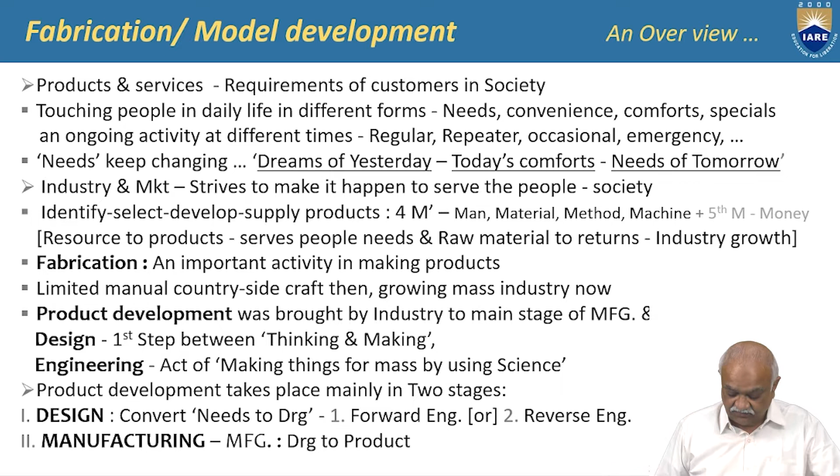This product development, the initial stages up to design, is majorly controlled by R&D - that means that is where the development, research, everything starts. And if you see product development as engineering, it has got two stages, two methods: one is forward engineering, another is reverse engineering.

Mostly forward engineering is the traditional process. What we do here is, we conduct surveys, we go for studies, and we identify what are all the things required for a customer. That means this is a process where customer needs are being identified.

The needs - convenience, comfort, specials, regular or repeater, occasional or emergency - all these things have different concepts. That means a need is to be studied in a different way than a comfort, and a regular one is studied differently than an occasional or emergency one. In case of emergency, it is a direct, immediate need, whereas if it is regular, it may not be an immediate need, but it has to be looked at in a different way.

In the same way, a customer never tells you, 'I want this.' The customer always tells you, 'it should be like this, it should be like that.' The designer only is converting that into a feature, that means a product. Suppose you want a pen, he says 'I want to write,' but he will never tell you 'I want a pen or pencil or color or this.' The designer converts that into a feature.

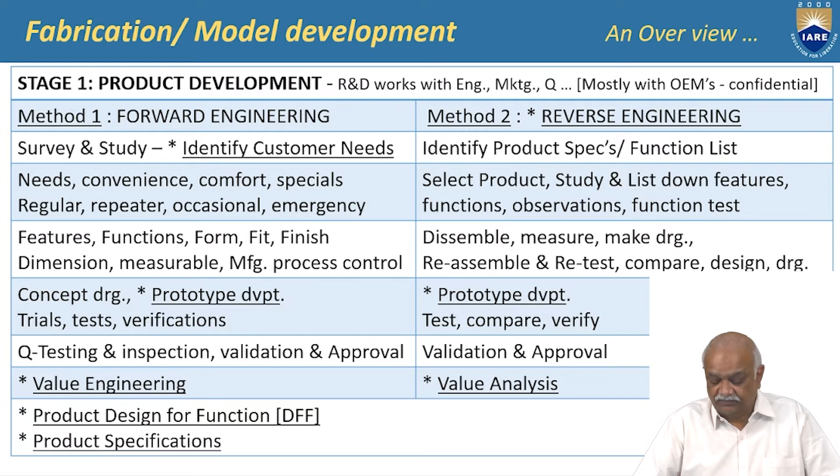Then we get into the next stage. After this prototype and concept drawings are tested, now we have to study whether it is manufacturable.

Sometimes what happens is, we can do it one or two, but when you have to do mass production, it is very difficult. Some processes may not be available, some manufacturing methods are very difficult. So we do design for manufacturing - that means whatever design, functions, features we have given, we discuss with the manufacturing people and then redesign or fine-tune it so that you make a drawing which is easily manufacturable.

Earlier, because we were making very low volumes, it was not a problem - disposal, waste, everything was less. But in mass production, in millions, you have to consider you are not spoiling the environment. You have to think about whatever items you are wasting or disposing, or pollutants coming during the process. If anything is hazardous to human life or environment, it is preferred to stop that. Lot of waste and gases will come, you have to avoid that. Otherwise you are putting people into danger, and society itself comes into hazard. That's why design for function, design for manufacturing, and design for environment - all three are very important.

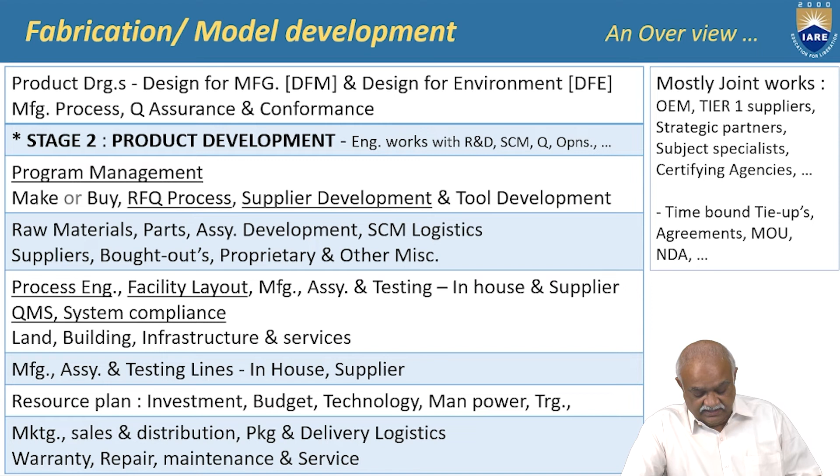In a simple way, input is from the customer, that is given to R&D, and R&D gives output as a product design. That is given as input to the company where it is manufactured, and the output is a product that is ready. It is given for marketing as input, and from marketing output is directly to the customer. So from customer, whatever is selected as a need, you have given it to the market in the product. In this stage, input, output, you have given.

But these are all wanted outputs - there are some unwanted outputs. What happens is, while making the product, you may run into some problems. You may be producing waste and you may be developing some scrap. All these things have to be returned. And if they are not returned, what happens is it gets left as junk in the society. What will you do with that?

So most of the time it is better to work as a closed loop. That means you have to take that waste, recycle it, reuse it, or take the feedback - whatever is good, continue it, whatever is wrong, correct it, learn the lessons and do improvements and upgrades. This is a closed loop - one on the information side, another on the product side.

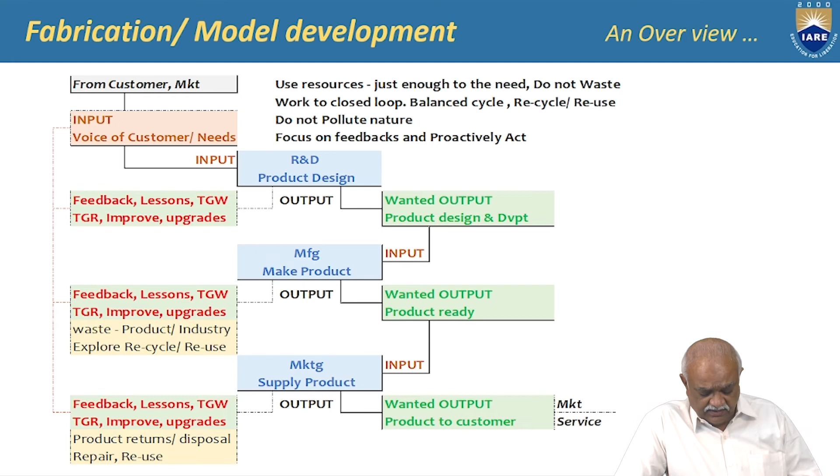If you go back to old cultural things, mostly we were working from nature. That means the agricultural farmer is producing vegetables or paddy, then giving it to food products - either a hotel or cooking, making it food, then taking it, then human waste. If you see that old process, most of the things are recyclable or they go into the bio - that means degradable in the regular environment. With industrialization only, we started adding some elements like chemicals and all, and some products are coming as unwanted products in the environment. We have to take care of that.

That is the first activity of product development. Unless they take care of that, we will not be doing justice to the engineering.

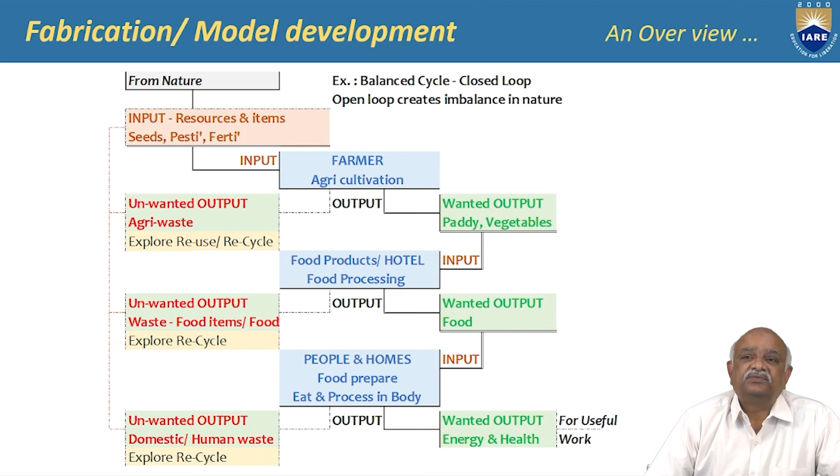In product manufacturing, at the time of manufacturing, it has to take a shape. That shape is given by the designer. The designer only is visualizing the idea and converting that into a drawing. So design is very important - the needs are being converted into features, and print in the sense, a drawing.

While doing this, in the initial days, the design process was a major activity. Design process means it is a step-by-step processing - you prepare the sketch, discuss with the manufacturing people, and make the product to be visualized as a product. It is not available, you are creating that. So while creating, you make it into a drawing so that others can understand it.

So traditionally, it is making a drawing - that means a product is being converted into a drawing and offered to the market, so it's in drawing form. For example, if you ask me how a man is, what will an artist do? He will just make it into a drawing and show you this is how a man looks. The design process is something like that - a product is made into a drawing.

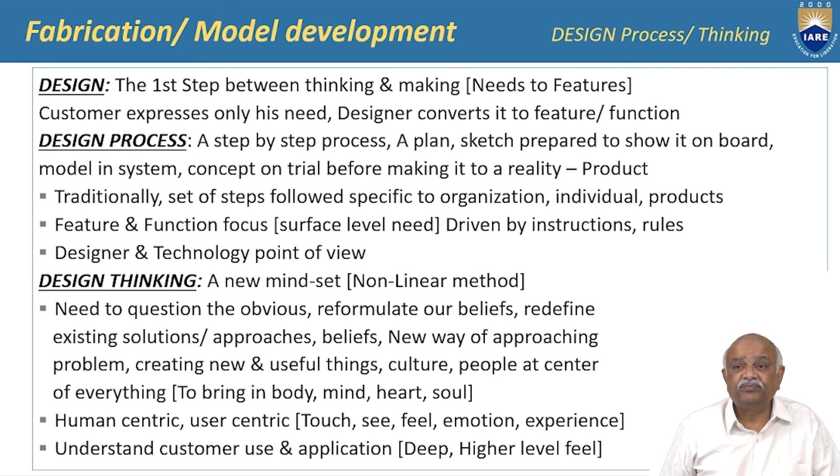Now most of the things coming in is that additional aspect. Earlier, if you see the chart, features were collected, needs were collected, and they were converted into technical specifications, then from technical into drawing. Whereas in the new process, you involve the customer, experiencing as if it is done by him - how he feels, what the problem is when you dig in. So you involve your body, and when converting that, you involve your mind. When giving it shape, you work as if it is your own child.

And when making the product for testing, you apply it so that you yourself are using it. Finally, when you test it and give it, and people say it is good, then your soul feels very comfortable. Suppose it is told that it is not good and you have to improve - then you correct it, convert it, and give it again. That much you are doing. Whereas in the earlier design process, you make it, give it, and if it is not working, you just throw it, or improve it next time.

That means you are not bringing the user into the picture except in the first stage. In all other cases, you are doing only whatever the customer told, and giving it. Earlier it worked because development time, if it took 1 year, within that year users' thinking or ideas were not changing. Whereas now it is not like that - every month, every day, ideas are changing, needs are changing. So if you take an idea from 2 years back and bring it to market now, nobody will buy it. That is why design thinking stays with the customer and tries to give more and more.

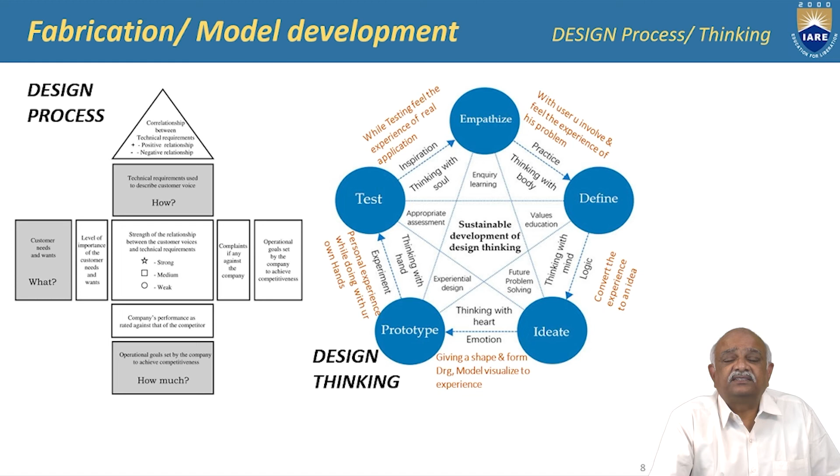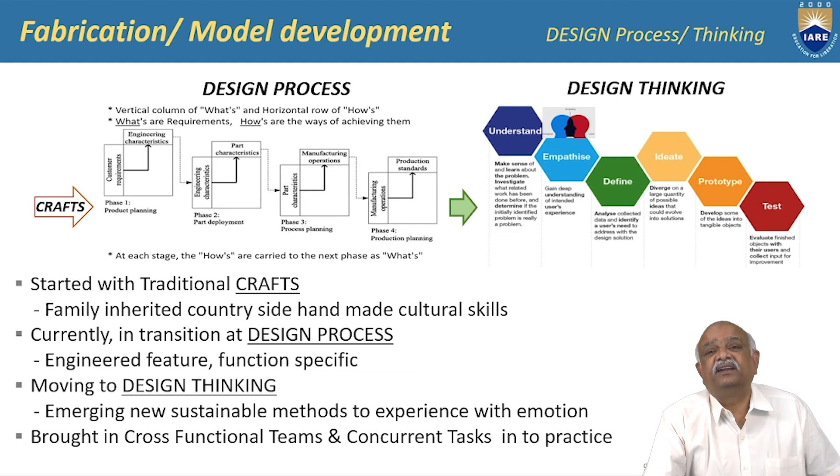This is another form - if you see how product fabrication moved, in olden days it was crafts, mostly done by families, with culture inherited. Over a period, people started going to urban areas, taking up higher studies, so this countryside craft took its death. With industry, mass production came into the picture and the design process came. Now, design thinking is one step ahead - it is going to give a feel.

You can see in the market a lot of products. For example, four-wheelers - a lot of developments have come. Earlier it was only a car, now CD has come, USB has come, Google Map has come. Appliances, if you see, earlier only voltage control, now programming, automatic, fully automatic, a lot of things have come. Online, offline, like this, the industry is taking the need and developing it.

In the process, what happened is, earlier we used to work in departments. One department completes the work, gives it to the second department, after completion to the third department - it was going in a linear fashion. It used to take a lot of time, and it is not giving an overall picture for anybody. That is found as traditional department work, and it is not in line with the requirement today.

So what happened? Cross-functional teams have come. The regular departments will be there, but across them there will be champions who will be running these new products, systems, projects and all. With this, people are working only timely for this project, and otherwise they are working in the regular department. So this way, there is a cohesion.

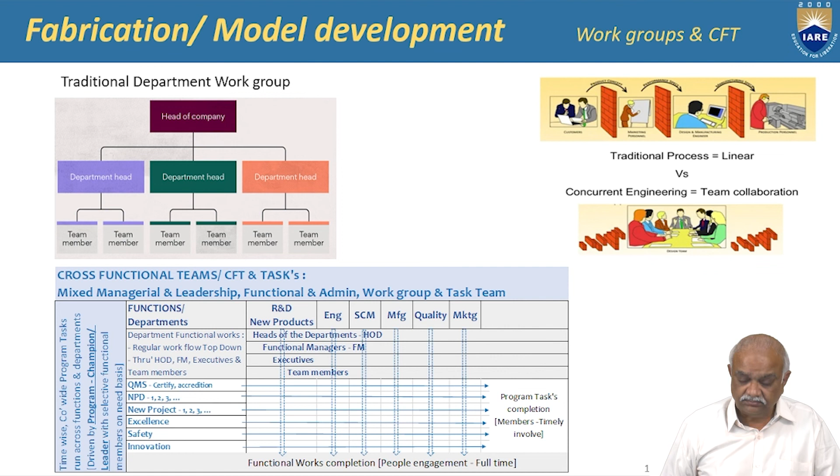So if you see the fabrication steps, they look very simple and look the same. And the journey also, when you read it on paper, looks the same. But every journey is different - it is a challenge. Why? Because the people are changing, the taste is changing, competition is changing, requirements are changing, and technology which was not available 20 years back is available today.

That time, people thought telephone itself is a big luxury. Today, telephone is gone - all videos, everything has come into the picture. So every product, with the time, with the people, with requirement, with competition, it is a new one - it is a learning. So don't just take it lightly.

Fabrication is nothing - and another thing you have to be very carefully see is, because of these products and services only, industry is creating life, is creating business. So many people have life in this. Industry is giving life for many people and a lot of joy for many. Of course, it is creating wealth also. And all these things are being done with a look on environment - that means you are not creating imbalance to the nature.